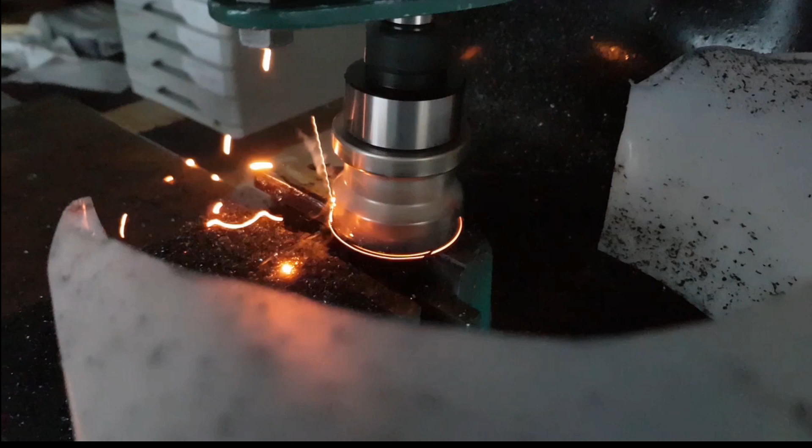Hi guys, again. Welcome to part 4 of making the large bore steady rest for a lathe.

I've made more progress, which I'm going to be showing you shortly. I do apologise for part 3 being quite long. In actual fact there were 46 films on that and I only managed to get 21 on, and they were all clipped down and odd ones speeded up in a fashion. So the rest of those are going to be in part 4, up to the 46, and then I'm going to start again making part 5.

So without further ado, I've had a lot of good feedback and a lot of guys looking forward to seeing part 4, which is fantastic. And I think there's a few people who've got these and have not started them yet, or people that might want to buy one, and is it worth it?

A guy called Mark said to me that he didn't think they were worth the money, but then I did look at steel to buy. I do have quite a bit of steel, and some of the steel I might have had, but most of it I wouldn't have had. It'd probably cost over £50 or £60 to make one from bought-in stock, and then it would have had to be my design, which probably wouldn't have been as good as this one, or how it appears this one's going to be.

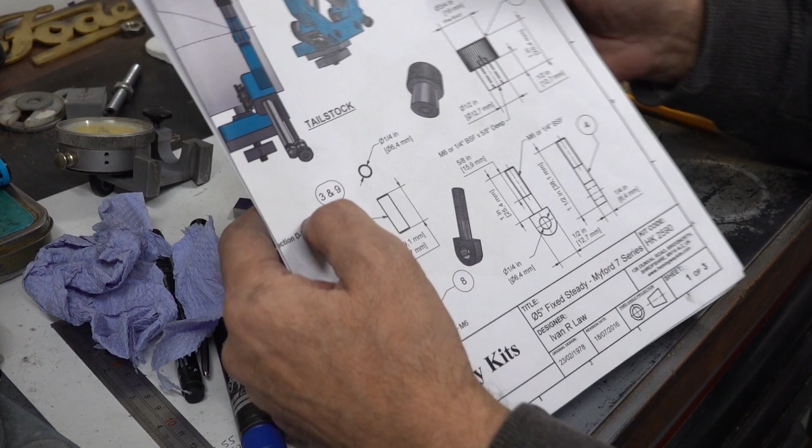That's made out of mild steel, but the one different thing about this lathe steady kit that I've never seen on any other is that every other one you use a spanner to tighten everything up. This one doesn't have any bolts with a spanner. They're all thumb wheels. So it's probably like that knurling tool, it's classed as a sensitive one. But this only has a thumb wheel on it, and it's 3/4 inch diameter, made out of steel supplied.

But right, so all these thumb wheels, do I make them out of some brass, which I've got plenty of, and polish them so they're all shiny brass bits on the painted frame? Or do I make them out of aluminium and anodise them, because I've still got all my anodising kit. It only wants setting up again. I've plenty of that chemical, and I've got all my dyes here. What have I got? Red, blue, yellow or violet for knobs. Or will they look nicer in brass? I'll just mix them out.

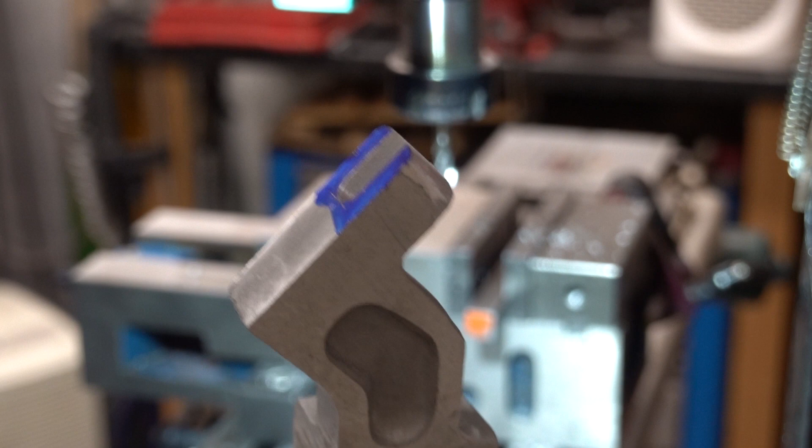Okay, so I showed you that slot a minute ago, done, which was that slot. So we've got this swivel bolt. I've only just put a bit of steel pin through just to hold it, but basically that is going to swing up, and then the nut goes on there.

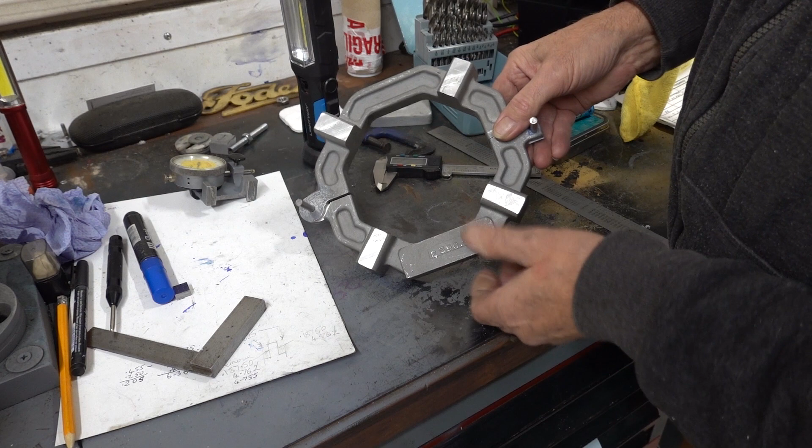So far things are looking quite good. Anything I'm not happy about? Yeah, this gap. If I hadn't had that gap, pull that pin, squash that up, I've done some tests, then this would have been about 3/4 of an inch diameter, and on the drawing it's showing an inch. I shall prove it.

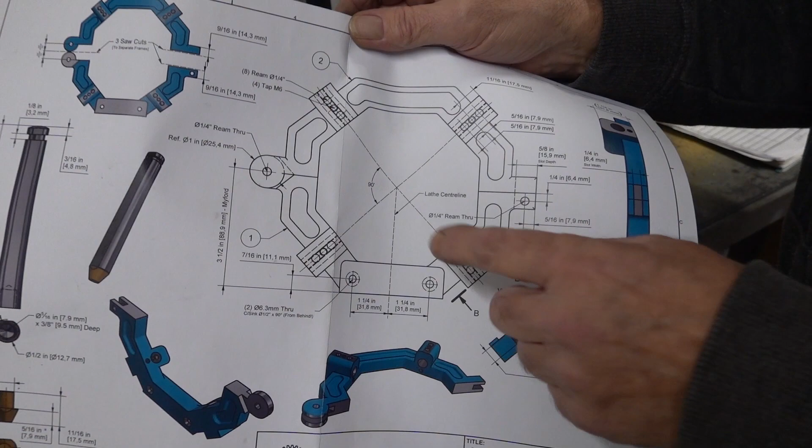This is the unit, and here it specifically states 1 inch, 25.4mm diameter, which is nearly what I've got. I'm just a fraction under, a few thousandths of an inch under.

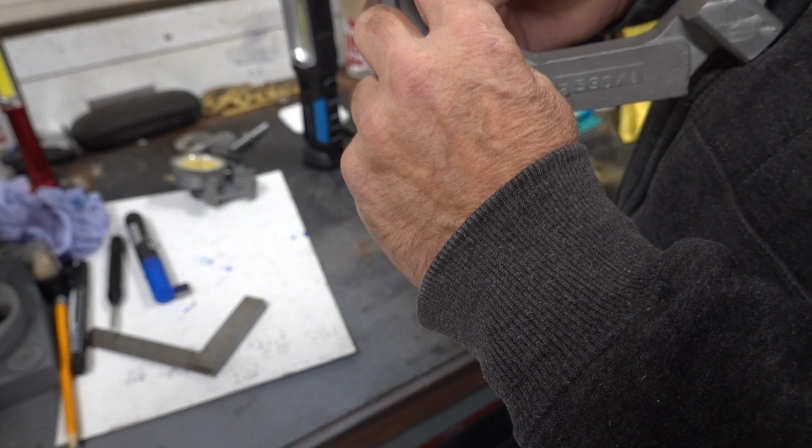Now, the other thing is, you put a level across there, it lines through perfectly across here, and same with the top section. So I know that that is level with that, and that is level with that, and also with this pinning and locked up like this, if I put a ruler straight edge across here to here, perfect. Across here to here is perfect. So I know that those are all lined up.

If I take that pin out, squash that up, there's quite a few thou air gap on the ruler when you line it through. So that is the right place for it, which again shows that the casting was a bit short. So what am I going to do about that? I'm going to fettle that so that's level with that, 'cause it's a slight bit out, and I'm going to fill that with filler. If any of you saw me do my Z axis drive, that electric motor adapter that came for a Bridgeport, you'll have seen that it was all honeycombed at the back, and I filled it with filler, rubbed it down, painted it, and it's perfect, and it still is after over a year.

So what I'm probably going to do is fill that gap. I'm quite good with body filler, done a lot of cars and bikes and things, so I'm going to fill that once all this is finished. It'll have to be finished first. I'm going to flatten it so that it is a closed gap, because it'll always annoy me, I know it will. And we'll make this look a lot nicer prior to painting it.

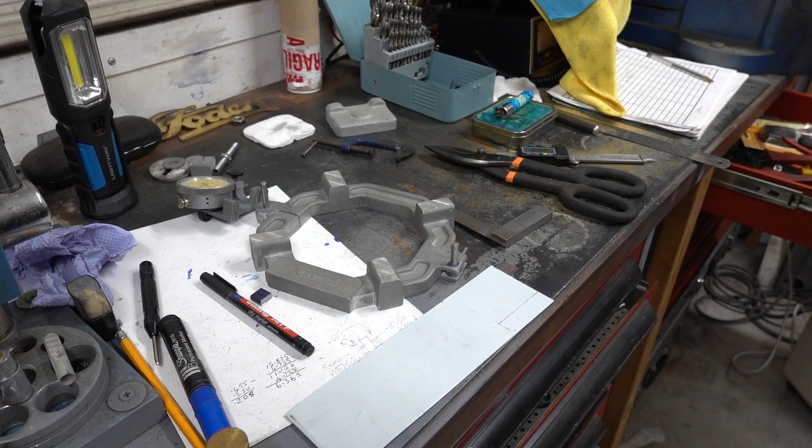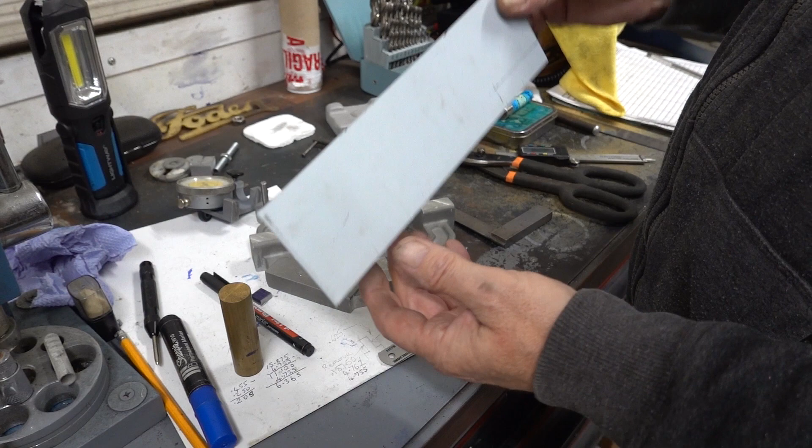I'm just cutting a shim so that I don't mark this up. Real thin aluminium. I got a big pack of aluminium offcuts some time ago. They were cheap on eBay, and this is probably the thinnest I can find.

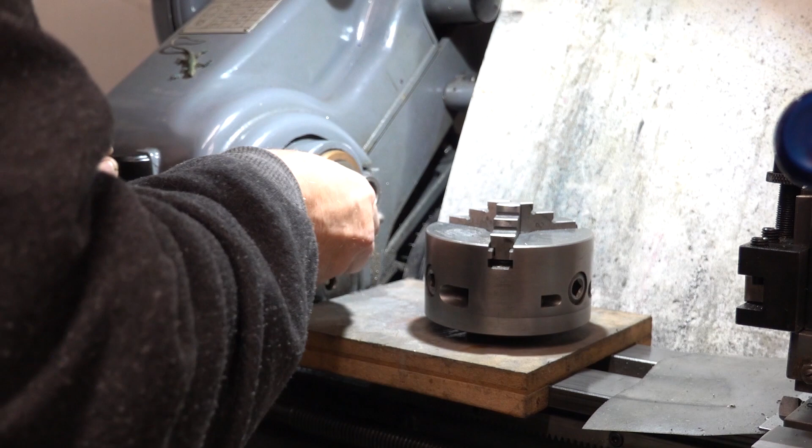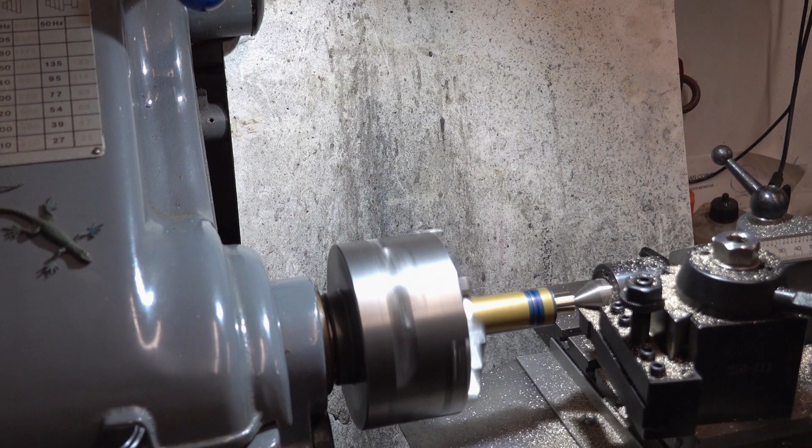Right, I've got it down at 40 TPI, running at 600 RPM. I'm just going to take a light pass off here, see if we can get a nice finish. If not, I'll have to rub it by hand. That one. Yeah.

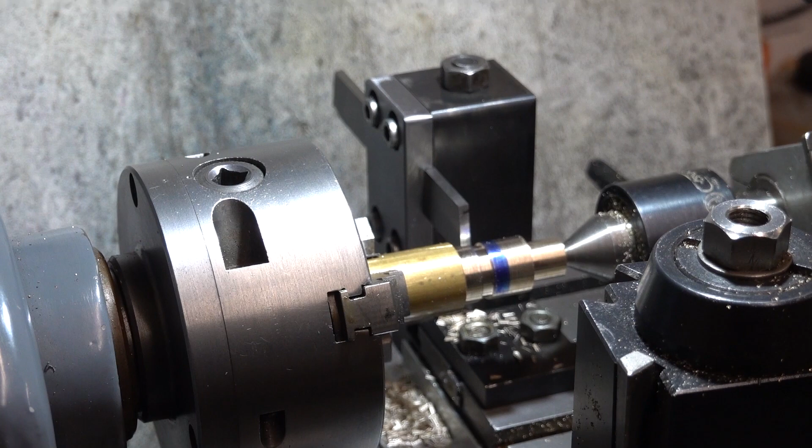Go a bit fast with it because it needs cutting down or parting off. Rear parting tool, homemade, as you will have seen in one of my videos. Should be enough.

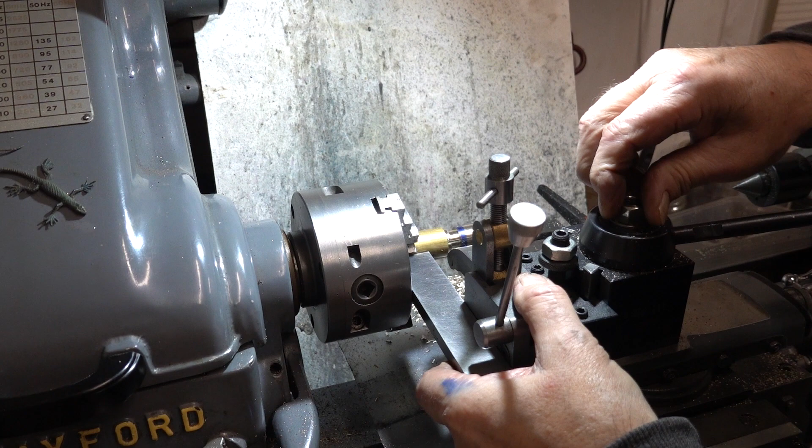Next thing. The monstrosity. I'll need to square up all this. Just using one of my parallels. To get rid of that blue marking first. Otherwise I'd have pushed it into the knurling.

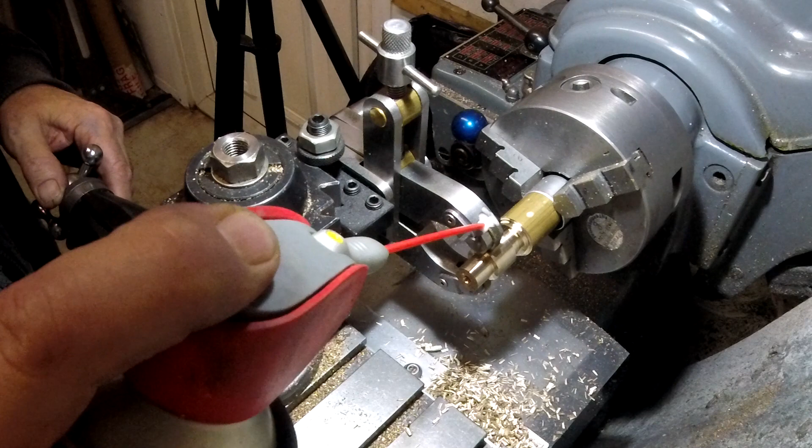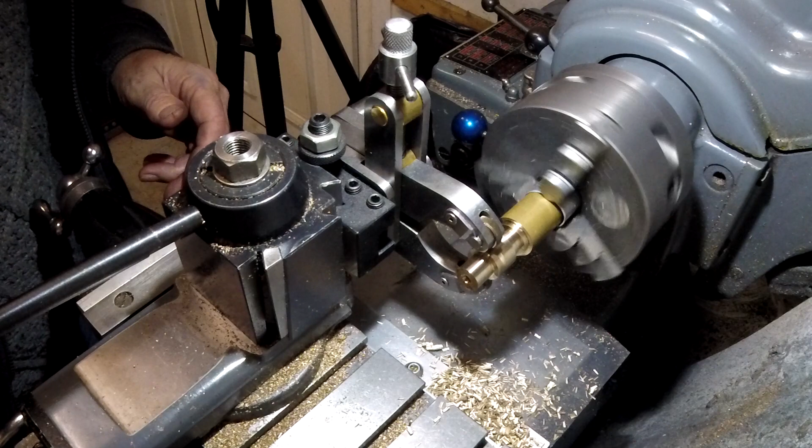Right, I'm going to give that a try. GoPro. If it didn't work, I'm sorry. Quite a fine knurl, is that? But we need to dip it a bit deeper.

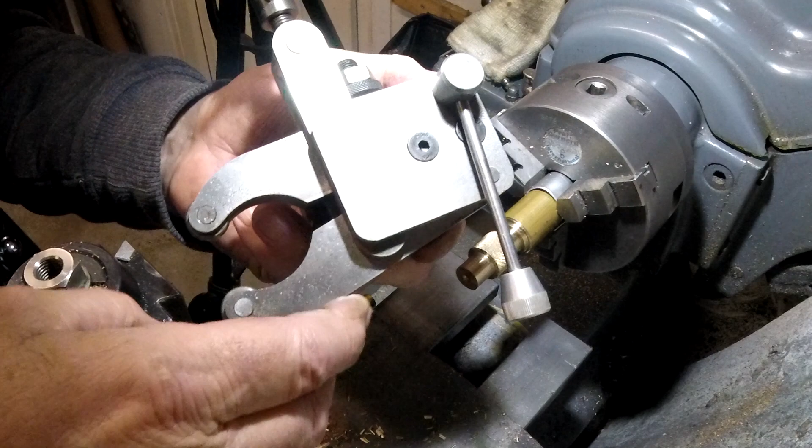If any of you are considering making the Hemingway kit, fine knurling tool, a sensitive knurling tool, I'd recommend it highly. I made this, and if you go back you'll see all my videos. There's 8 parts to it of actually making this from bar stock.

This lever is an eccentric cam on here, and as you pull that lever it puts pressure on here, so you wind the handle down till you're biting on the work, give it a nip, and then you use the lever. You don't wind that anymore and do a run, and that's the result that you get, which is stunning. I'm going to quieten things off by that.

Need to get ready for reverse. I might knock the camera on this. Sorry guys if I do.

Machine tap. That'd be alright because it's got a necked shank and I could get down to, oh, it just about do it. Experiment. You just make do and mend with what you've got sometimes. Goes. Don't you break on me. Might need cleaning out, I bet the end's bunged up with brass. But we're nearly there. How do I get crap out of there?

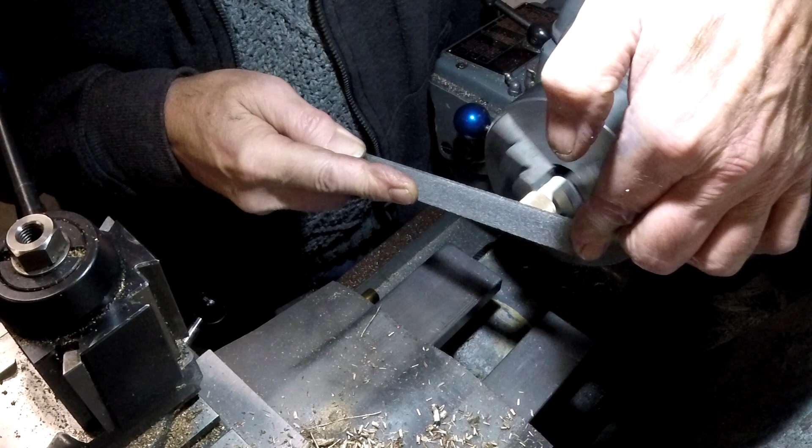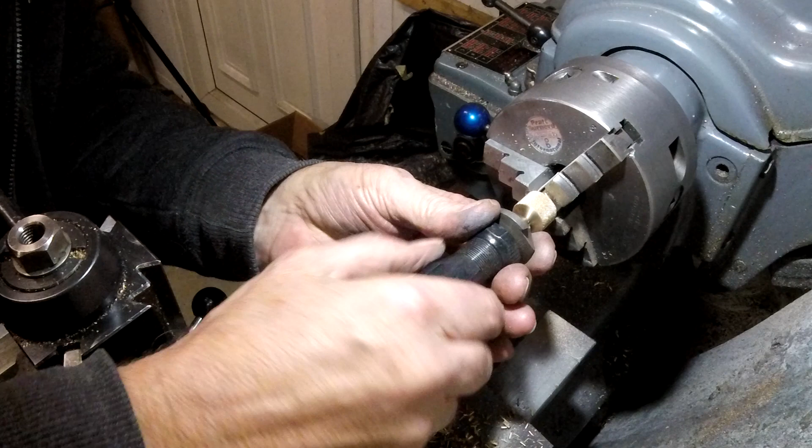Right, I'm going to have a go at doming this. All thread has come through, so we're good. So I'm going to grip it on that with some aluminium, and I'm going to have a go at playing with this. Best stuff in the world. Let's have a look at it. No, I think that looks nicer domed. Still see some lines in it there. And that, I don't know whether I'm going to need a washer on this. Let's try it all together and see if it fits.

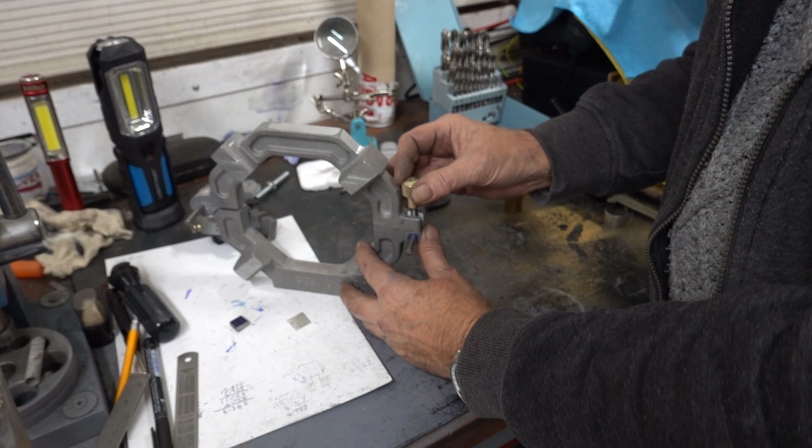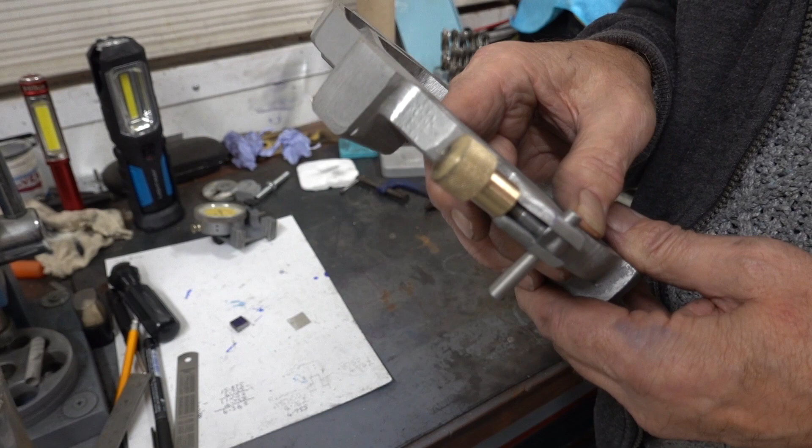End of GoPro session. Right, let's try it together, see if it fits. Of course it will, we know it will. Just turn the camera so I know what I can see. I think that'll want a washer under it. That's it. Locked up. I cleaned that with some brake cleaner. Quite happy with that. So that's the frame fit. Ooh, the pin's dropped out. That's the frame finished, as in it clamps together.

Obviously this has got to be milled to get a centre height of 3.5 inches for the Myford. There's that to machine as well. But the next will be these holes. Now I'm still waiting for some long drills that I ordered. I daren't drill that end and then turn it round and drill that end, because I'm guaranteed they're not going to be in line, and it'd be a right job setting them up. So my plan will be to drill right through. I've ordered 2 sizes, I think a 6mm, to pilot through.

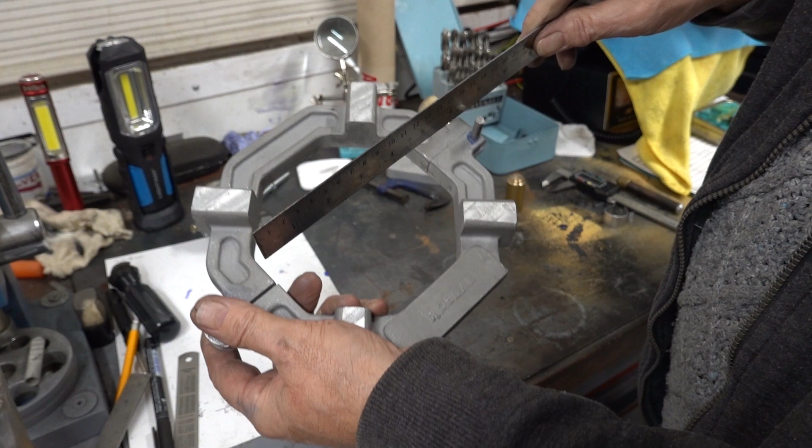But you see, they're bang on. You see that? They're bang on. Whereas if I close that gap up, they're not. Which is what I was saying earlier. And that is, see, that's bang on as well. So if I'd have closed that up, that's just a bit proud too. But they are perfect. So I'm hoping that it all works out right. Of course, I've got to be careful.

Right, so we're making the fingers now. There's 4 to make. I'm going to make 1 on camera and the other 3 off camera. And it calls for a chamfer on the end of there. Oh, I think that would be too sharp, would that? Or would it? It's not descriptive really. Yeah, it just shows that there's a chamfer on the end. Comes to like a button in the middle. That's probably going to do it. I think that'll be enough. There's no given depth of cut for this on the drawing. I've just had a right good scan of them and I can't find anything.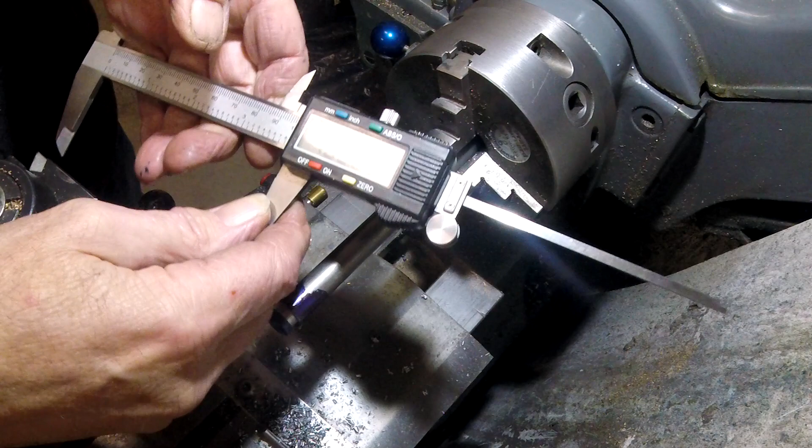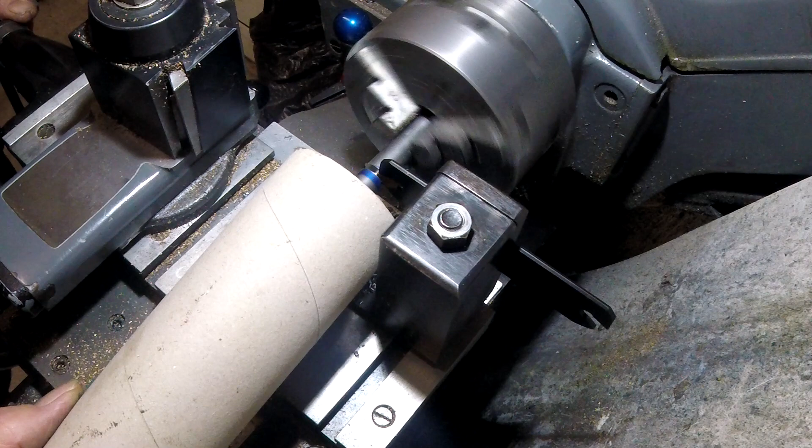We'll part it off. This rear tool post has been infallible, been brilliant. No more juddering. Famous last words. Oops. Got camera. I've knocked you out of line, I'll check it in a second. I knew that I'd do that. Yeah, I'm going to have to bring it out a bit. I'll go turn it all the way. I don't think any of it is.

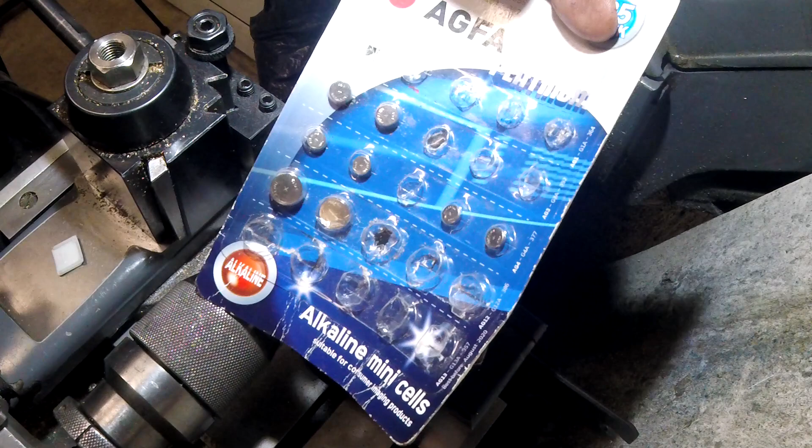Even that, because that wants drilling now for the brass finger. So that's going to be drilled 5/16 to a certain depth, which I'll do now, and then it's going to go to the mill and have a flat put on it, the full length of it. Is it time for a new battery? I think it is, because this little DRO on here, which you can't see. I got this about 3-4 years ago. It was £1, and it's got rows and rows of batteries in, and it's actually got the one I want. Hey.

Taking it out of here and setting up a milling machine, and we've got a flat right across it. What it does show is that the brass fingers that you put in, you have to make those out of brass. I might see if I've got any phosphor bronze, but I don't think I have. You make them obviously to slide in there and Loctite in, or a press fit, and then the taper to a point, so when all four come together you can get to a small diameter of bar.

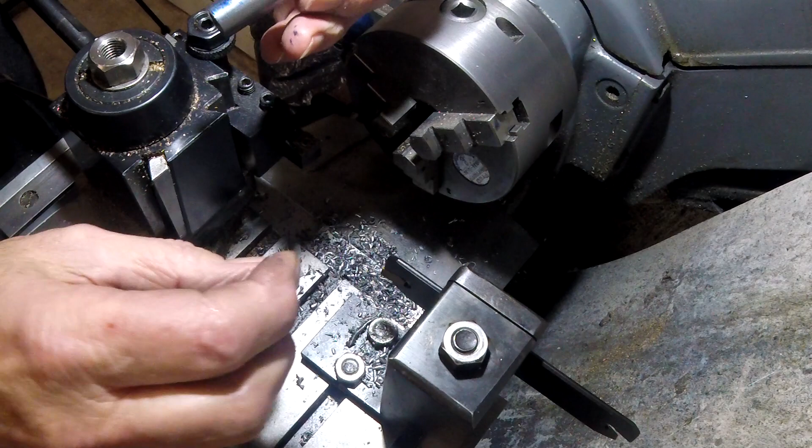But it also shows that the flat that's on here runs across onto the little bit of brass that's on a shoulder before it tapers, and it shows that machined. Now whether they've just done that because they've made them all up and then stuck them in the machine and done them, I don't know. But for this finger to come out easily, it would need the flat on the brass, otherwise it'd catch.

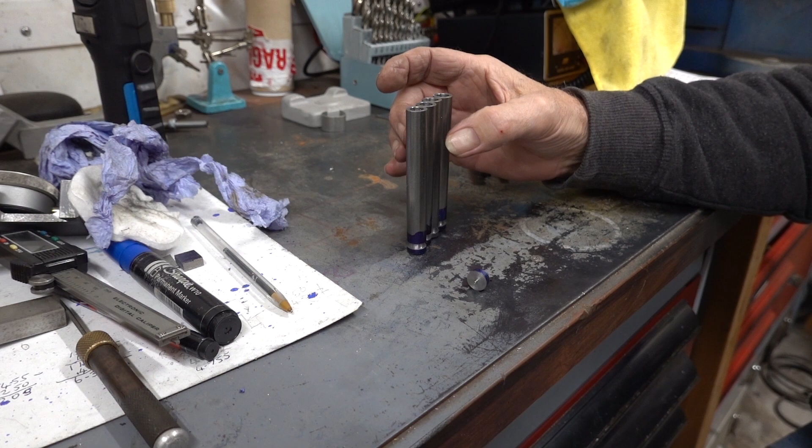Right, so I showed making one of these fingers on the lathe, and the rest of them I've made off camera, so they're all done. They're all exactly the same. I did have them stood up so you could see they're all the same height. They're all bang on.

And what we've got is there's this little chamfer on top that isn't for anything other than probably decorative, and then there's this slot which I got a little bit out, but it don't matter because to match that I've got to make some screws. They'll have a shoulder on something like that that'll then fit in that gap, and that's what draws them up and down, so that doesn't matter. I'm talking about, I think, 0.5 or a mil. I was quite a way out in engineering terms, but as I say, it don't matter. There's not any critical measurements for any of this really.

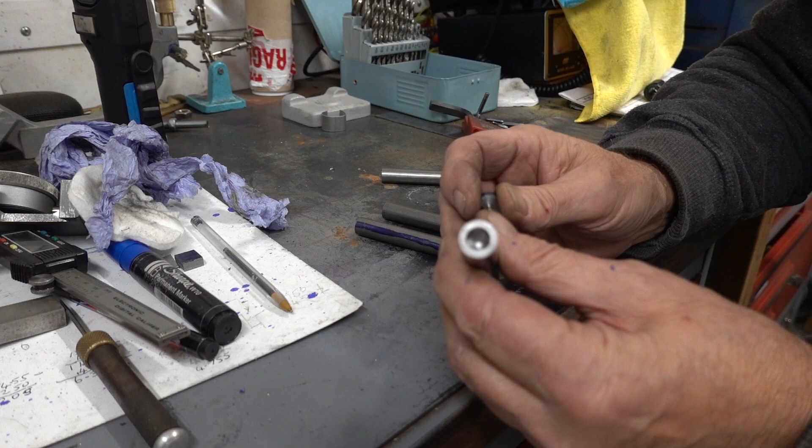That's 5/16 bore. Measured that using those drills, and it's just under 5/16, which is probably a good thing, but it doesn't matter again because I'm making the brass fingers to fit there. Now I probably would like to make them a press fit where I could press them in on the press I've got. The alternative apparently is you use Loctite and Loctite them in.

And so out of the two pieces of bar, I made a small error on one end. I'd measured this wrong and started my groove too early. So I pulled the bar out, it was a fresh piece, and measured it, and there was just enough to do what I wanted to do and correct it. So I parted it off and started again, and I just had enough on that stock to do the two. The first two, which I didn't make a mess of, that is what was left of the bar. You make a little spinning top of it, but that's what's left, about 4 mil once you've parted them off.

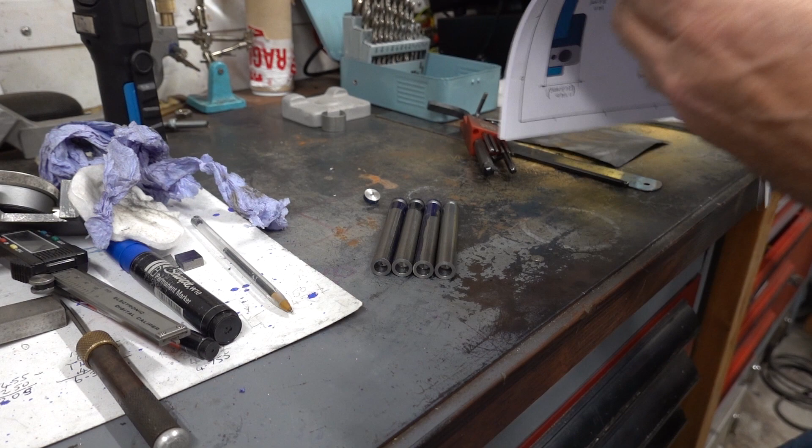The rear parting tool that I made has responded absolutely beautifully, not a jitter. So yeah, rear parting tool, definitely a good addition to a small lathe. That there gives you some measurements. So it's 1/2 inch bar to start with, and 7/32 from the centre to the top of the flat. That's the 5/16 bore hole by 9.5 deep.

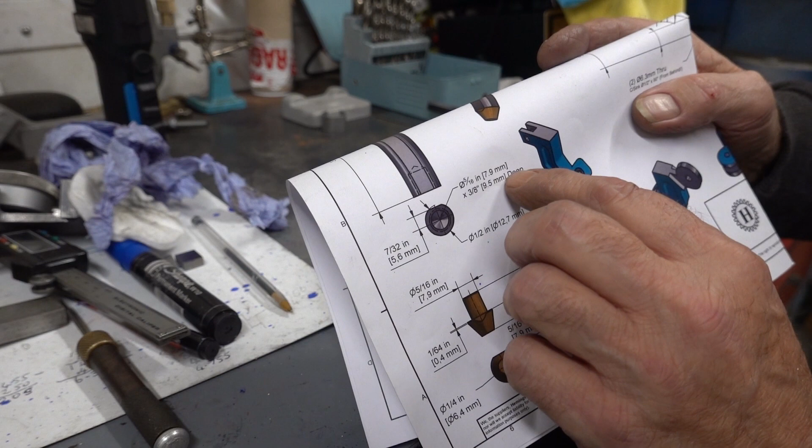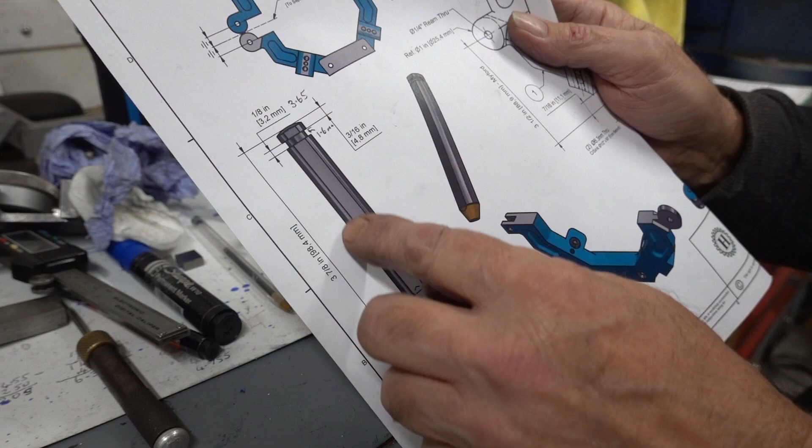So yeah, I've got to put them in and centre them, then measure up. I suppose I can probably do it with a centre finder. Anyway, there's a little skim to come off the top of them, and they end up looking like this then. This finger here, and that fits in the flat. It don't fit in the flat, it fits in that round hole.

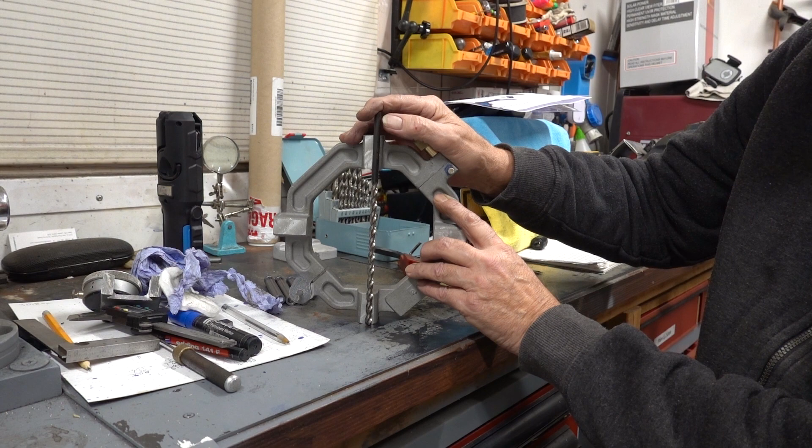So I've got to mount this in the mill and clamp it, and then I've got to drill right through here a 1/2 inch hole to take these fingers, but I'd need to start there. So I don't know if this drill is long enough to go right through to there. Might need to move it in the collet once or twice, but that is long enough to get my holes through. Because you've got to remember, I've also got to keep this up off the deck by a little bit so I don't drill the bed. So there's that to look out for. So I'm worried that with that and that, I'm probably not going to have enough travel on the knee.

I mean, it's a hell of a milling machine when it comes to that distance. I lost half an inch, I believe it was, of height when I fitted that Z-axis drive, and I even thought I might have to undo it and pull it off while I do it. But I wouldn't like to have to do that, because that means the pinions all got to be set up again if I do that, so I didn't really think that's a good idea.

But I could do this in pillar drill, but I don't want to. I want to do it on milling machine, because I want that hole down through there to be bang on, so when it gets down here it's in the right spot here too. So yeah, there's a fair bit to do there.

Only other thing would be to go through, obviously, with a short drill first, get this going, get through here, then I could take that out. Of course I could, couldn't I? I could take that out. I might have to move this, I'd have to thread it in, wouldn't I? Might have to thread it in and then put it up into the chuck. At least that would get me then my distance. Yeah, there's always a way, isn't there? There's always a way. We'll work something out.

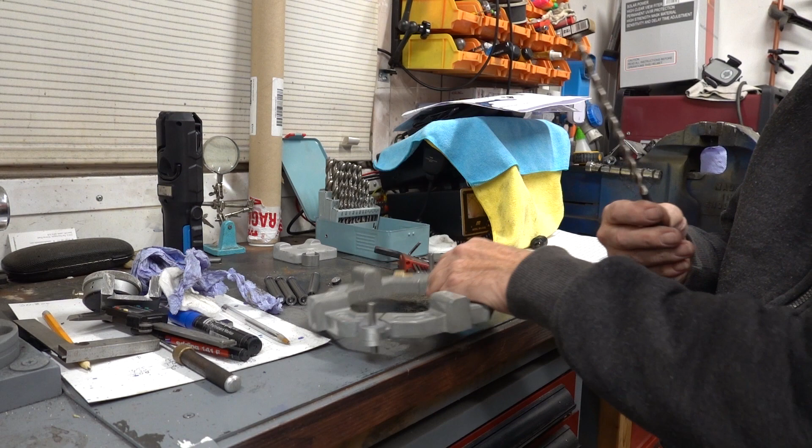But that drill's not big enough, but that might do to pilot it. I just don't want it to flex. It's a bloody long drill, that. It's a good old quality one. Very good quality. 6.8mm HSS Hartner SS208. Whoever Hartner is, thank you.

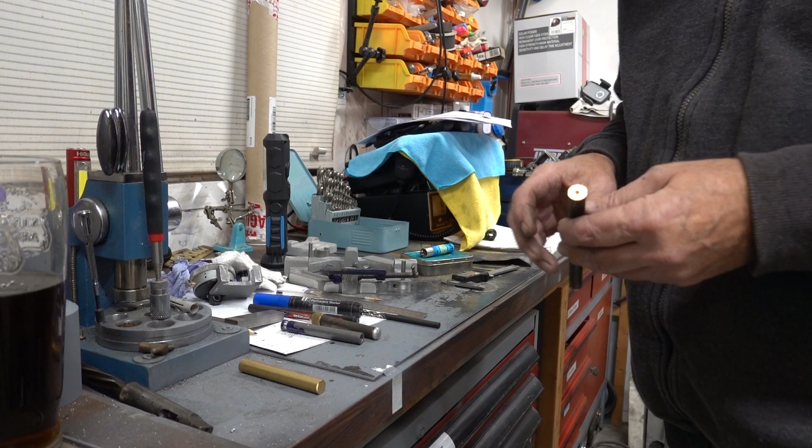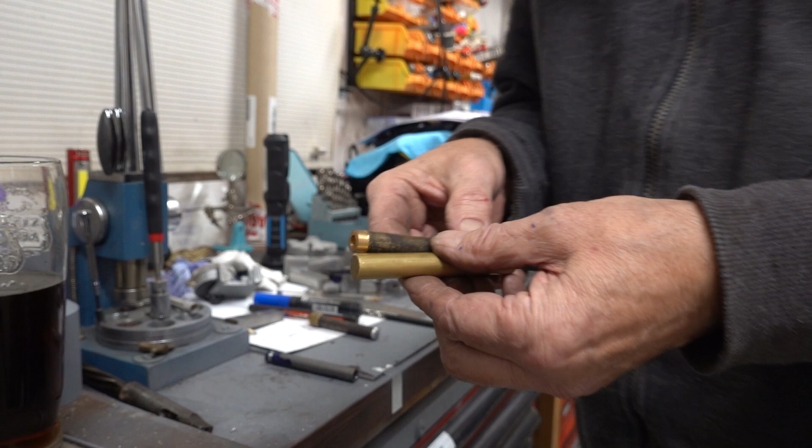I'm just joking. Just a little add-on to a little snippet. This is the piece of brass that comes for the fingertips that go into the end of here. In my drawer I found some phosphor bronze. I'm sure that's phosphor bronze. I'll show you it to see if you can discern the difference. See, that's brass, which is yellow. That looks very coppery, like copper. But it's not copper. I can show you some copper.

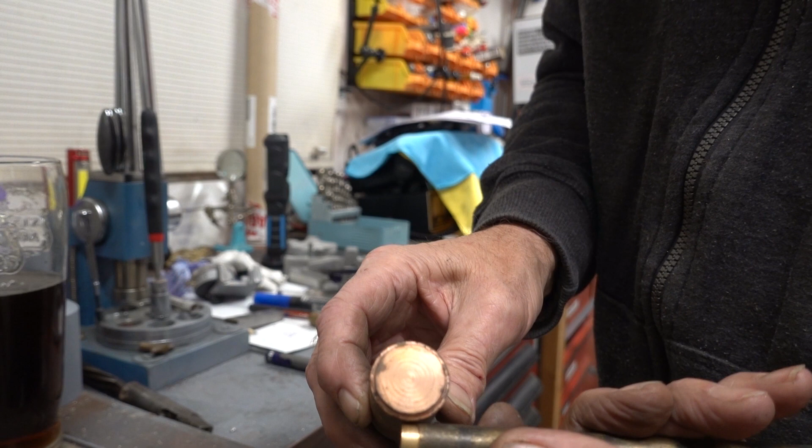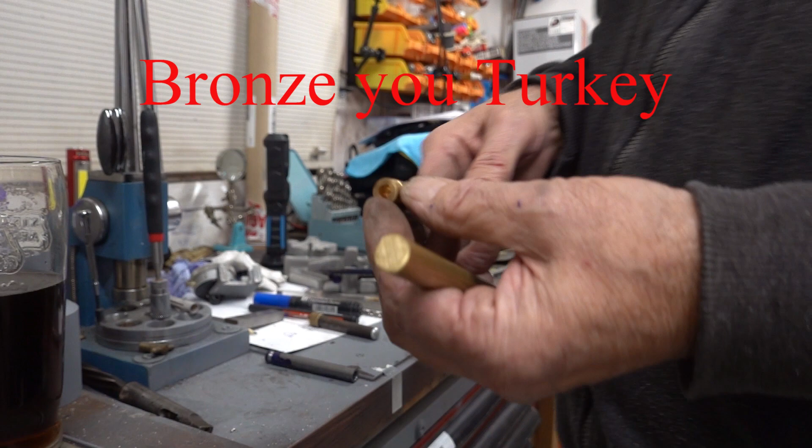See, that's copper. Indeed difference. So you've got copper, phosphor bronze, brass. There's obviously more copper in that. I don't know, whatever it is, mixture. But that is 12.5mm diameter. It's ½ inch. That is 12mm diameter. So that's 20 thou smaller than that.

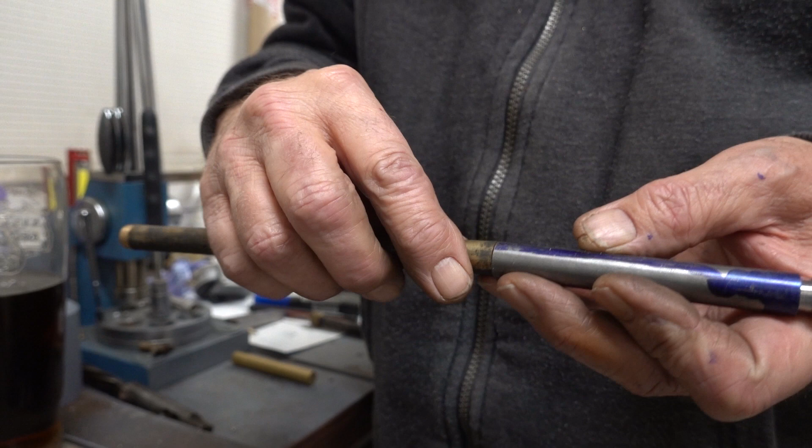Now, does it matter? Because I'd rather make them out of phosphor bronze. All it means is they're going to be 20 thou smaller, which is only 10 thou each side of here. Smaller. And I've got enough here to make all 4 easily. So, do I make them out of phosphor bronze, 10 thou smaller all round? I think I do. I think I do.

It's definitely better than brass. Brass is quite hard, really. Phosphor bronze is not. It's quite soft, but it's hard wearing, which is why it's certainly used for certain types of bushes. It's just that it's very expensive. I just thought I'd add that titbit in. I think we're going to go with the smaller phosphor bronze.

Well, I hope you enjoyed that part 4. Everything seemed to turn out well. My setup, there's a lot of guys on Model Engineering Forum, for instance, and other guys that watch my channel that will probably know how to set up better than I do.

I'm very much an amateur, and sometimes I might make a setup and a clamping arrangement and it don't quite work out, and I haven't considered something and I have to take it all off and start again. Whereas probably you guys would do it in 5 minutes. It might take me an hour, and sometimes I've got the video camera running all that time, so obviously there's lots of stuff to clip out. You probably wouldn't want to see that.